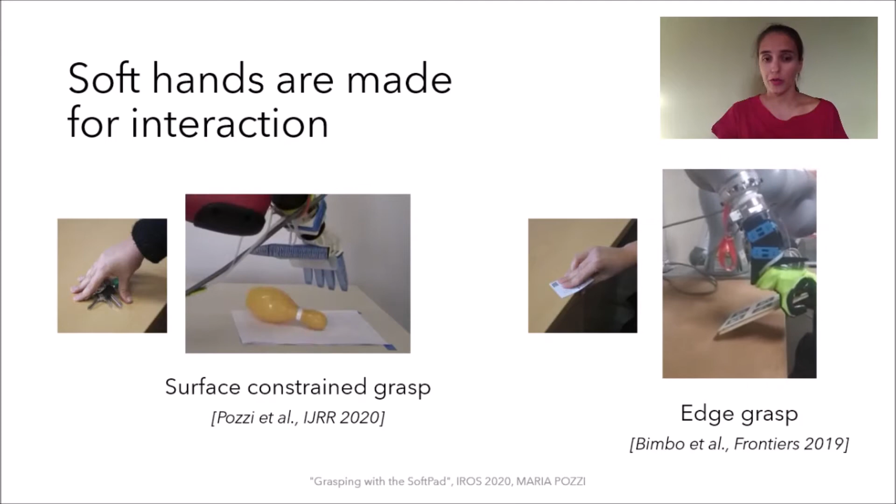Soft hands are made for interaction. They can actually exploit the environmental constraints to perform safe and robust grasps, as we see in these videos.

Normally, grasp planners thought for rigid hands and rigid grippers tend to avoid any kind of interaction with the environment to avoid damage.

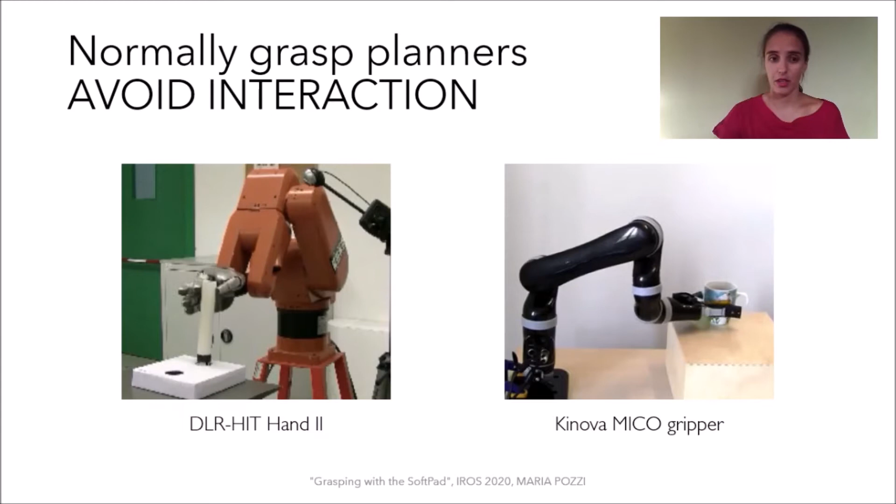So in terms of hand-environment interaction, we can have a soft hand interacting with a rigid environment, which is a safe situation. We can have a rigid gripper interacting with a rigid environment, which is not a safe situation. But what about having a rigid gripper interacting with a soft environment?

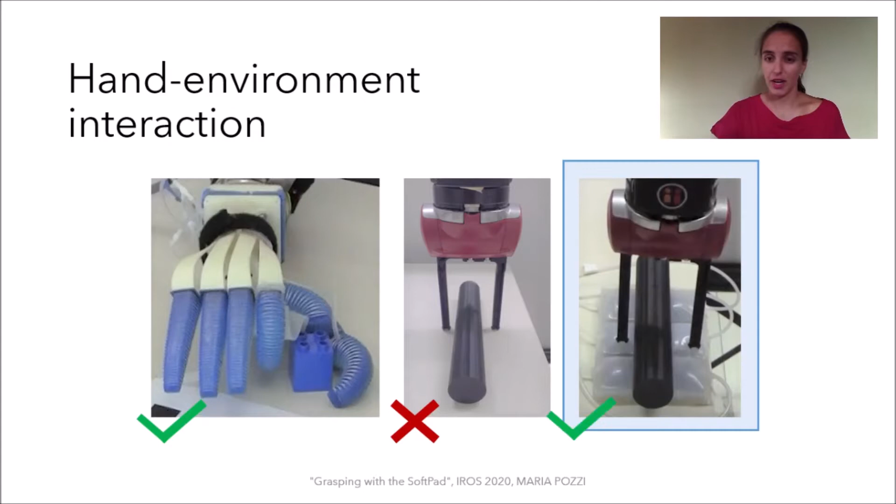Well, this is the vision that I want to propose in this presentation, and I will actually present a device that enables this scenario. This device is called SoftPad.

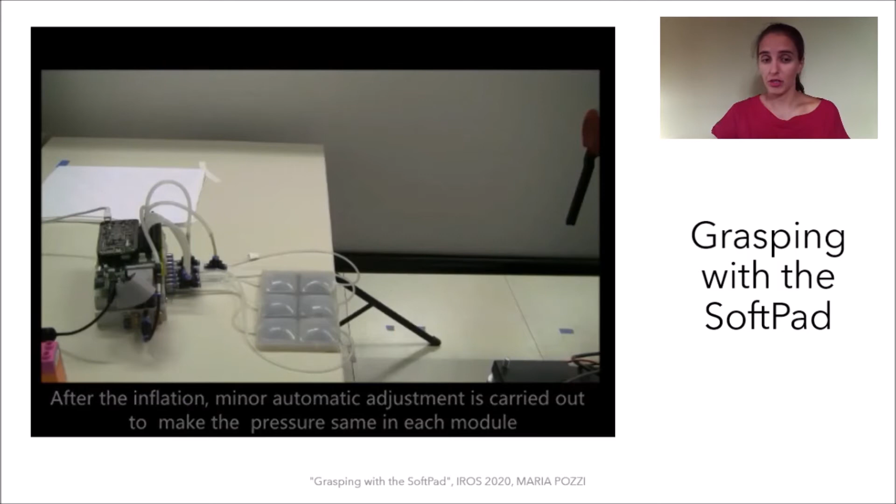SoftPad is a matrix of pneumatic modules made of silicone. Each module is connected to a pressure sensor and is independently actuated.

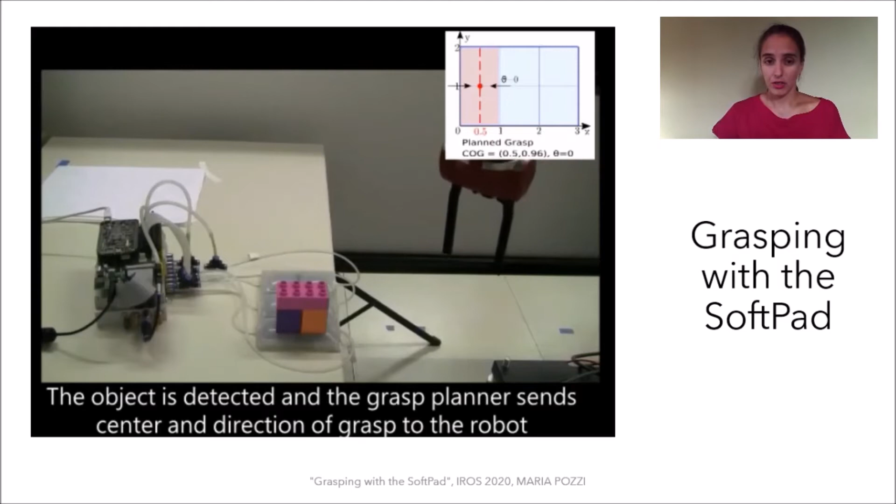When we place an object over the SoftPad, we can detect the modules that are in contact with the object, and in this way we can actually locate the object over the SoftPad.

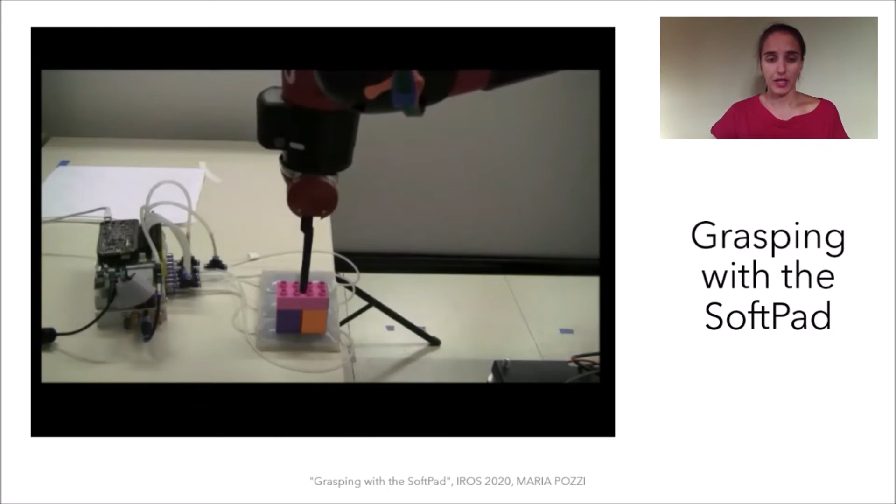Then we can also estimate the center of mass of the object, and based on this information we can plan a grasp with a gripper. When the gripper touches the SoftPad, it detects this contact and the gripper starts closing.

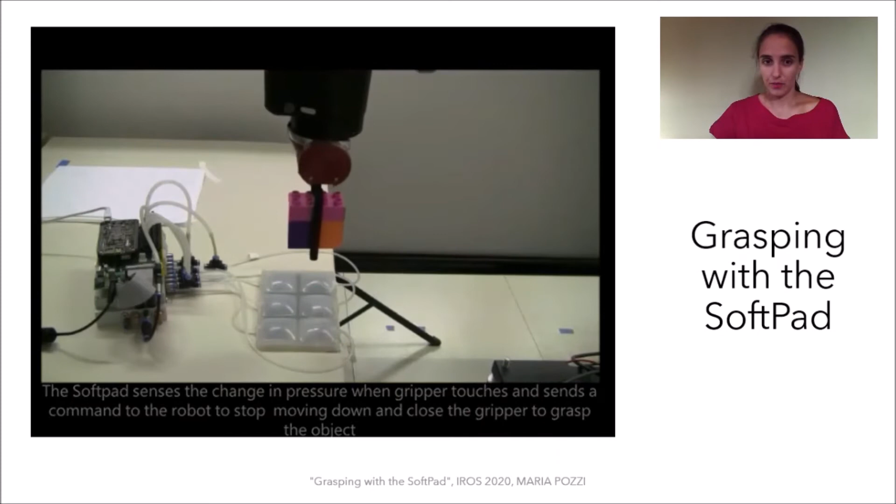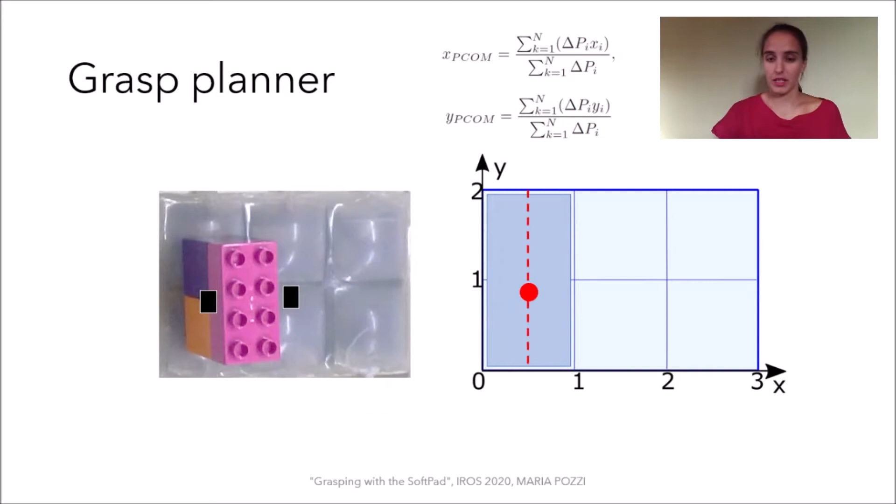So for a simple object like the one that we saw in the video, when we place it over the SoftPad, we have that the modules that are in contact with the object are detected. Then, based on the entity of the pressure variations inside the SoftPad, we can actually estimate the center of mass of the object. Then we can estimate the direction of the object, and then we can plan a grasp accordingly.

The grasp is made of a center of grasp that in this case corresponds to the center of mass of the object, and as you can see it is a bit shifted towards the bottom of the SoftPad, and the angle of grasp in this case corresponds to the perpendicular direction to the object orientation.

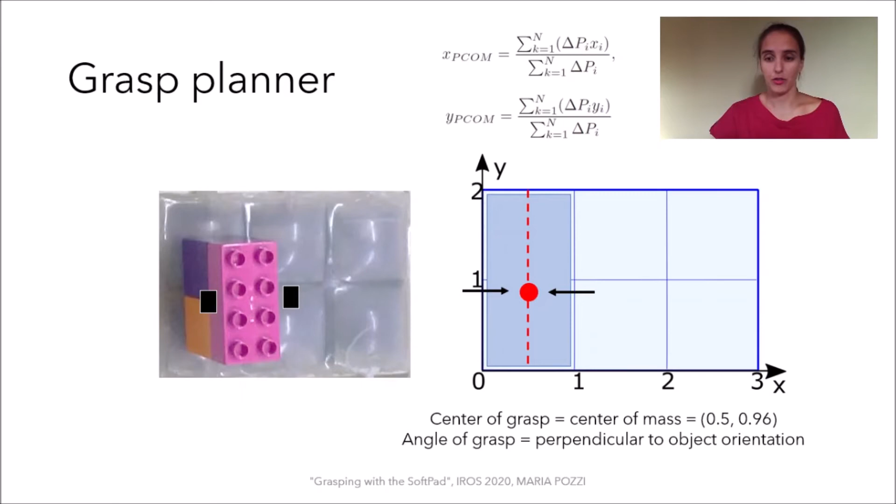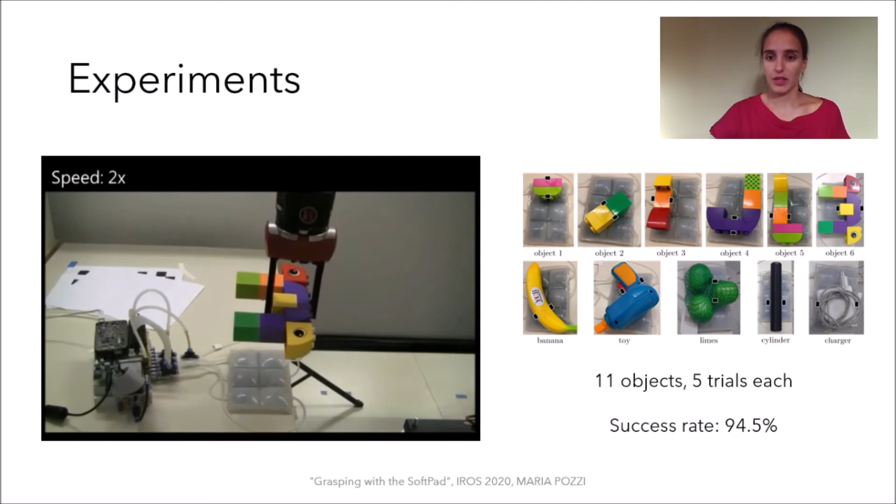For more complex objects, we can extend the procedure that we just saw, and we actually tested 11 different objects, 5 trials each, and we had a success rate of 94.5%.

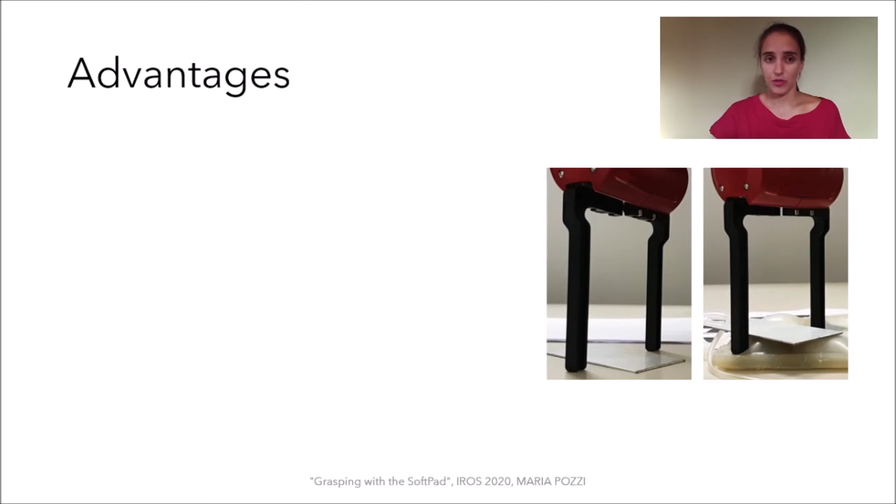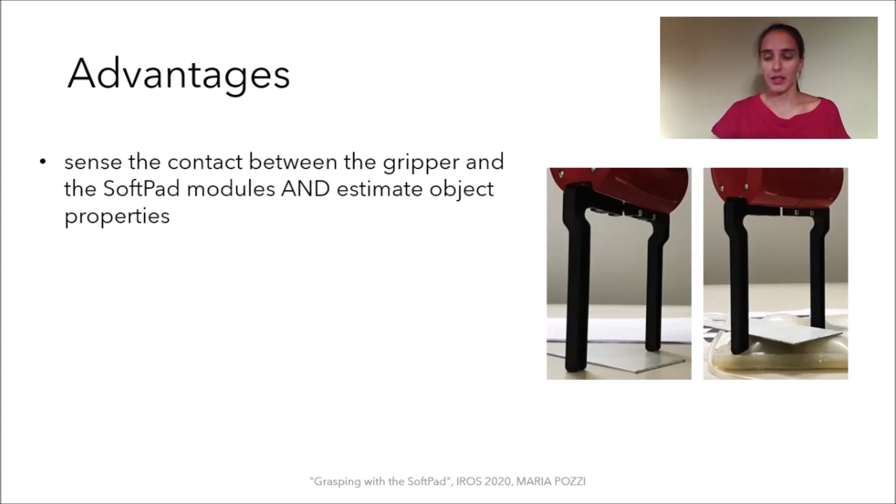The advantages of the SoftPad are several. First, the SoftPad as a single device can be used both for sensing the contact between the gripper and the SoftPad, and also to, as we saw, estimate object properties. In particular, we can estimate the object weight distribution that is not possible to do with a vision system.

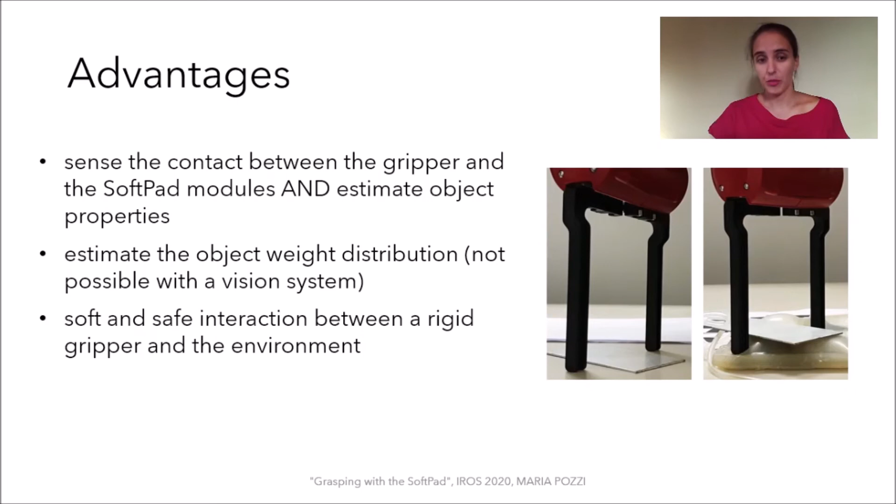Then the SoftPad enables a soft and safe interaction between a rigid gripper and the environment. And the design of the SoftPad is adaptable to the application at hand because the SoftPad is soft and modular.

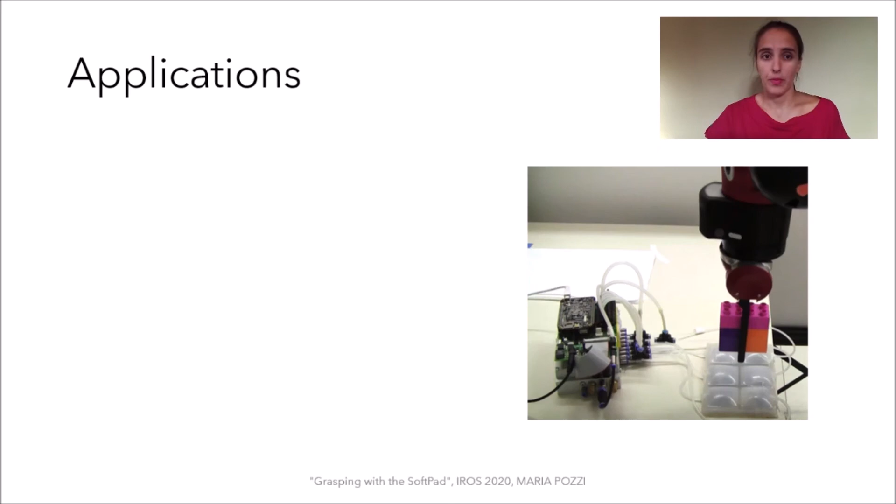The SoftPad can be applied in industrial scenarios, for example, to instrument the environment with soft inclusions. We can think of having soft inclusions in conveyor belts or other complex surfaces, since the SoftPad is very adaptable.

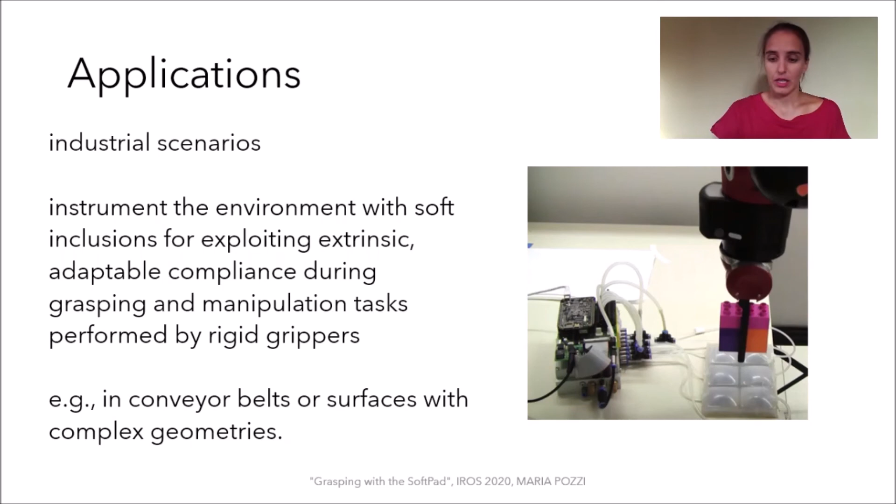Our future work will focus on improving the scalability of the grasp planner, on investigating whether the possibility of inflating more or less the SoftPad can be exploited during grasp planning, and also we will advance the SoftPad FEM-based simulation framework that we already tested for one module and we want to extend to the whole device.